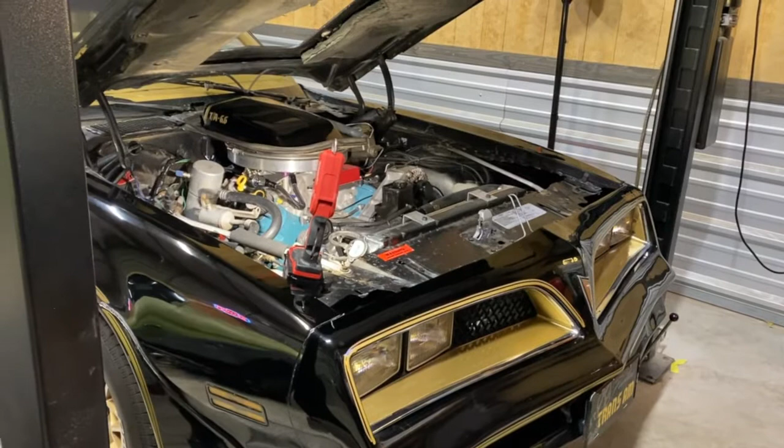Tonight's video, we want to cover some of the questions people have on the LS swap while keeping the 4-speed, factory 4-speed transmission. Before we did this swap, I looked on YouTube and online, and there were some answers, but everything was kind of like grab this bearing, grab this clutch, use this part from this other truck and put it all together and it may work. It was basically a mishmash of parts people were coming up with to make this work. There wasn't anything straightforward, any formula that says if you have a second gen F body with the old style Muncie or the Borg Warner Super T10, how do you connect the old style transmission to the new style engine and keep everything the same?

What I want to concentrate on tonight's video is going over that with you guys, giving you a little information on what we learned. It might not be the best way to do it, but this is the way we did it, and it happens that everything worked out for us.

In our situation, our car is carbureted. It's a 6.0 LQ9 engine, and we kept the carburetor. We went with the Edelbrock 7118 intake, and then the LS series tuning box, which is a 6014. This comes as a kit you can buy all together, so that's what we decided to do.

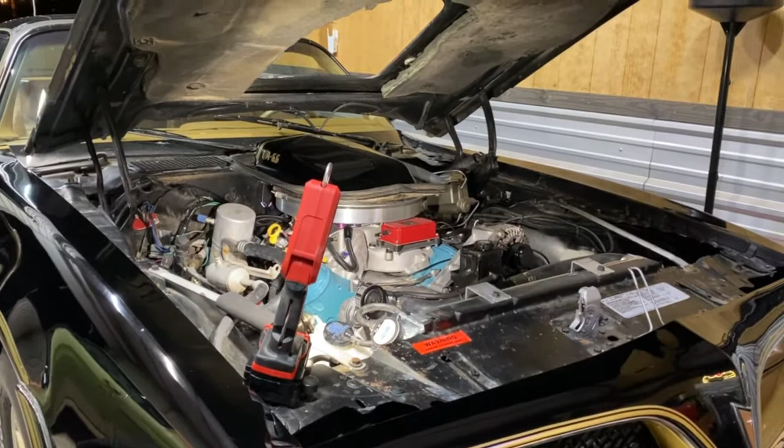But back to the transmission. The correct way to do it, and to get the best bang for the buck, is to order a transmission from a company called American Powertrain. They sell bolt-in kits with basically a 5-speed, or I believe you can order a 6-speed, a newer style transmission that will bolt up to your LS motor. It'll give you the new style transmission with 5th gear overdrive, since as you know these 4-speeds do not have an overdrive.

So that's the way to go if you want to do that. I tried to go that route, and I called American Powertrain - I'm sure they're worth every penny. I've seen plenty of coverage on the Optima Streetcar Challenge, different Pro Touring Camaros and Trans Ams, and some C10 channels using their transmissions. But man, it was $5,500, the quote I got to put one of those 5-speeds behind my 6.0. Don't get me wrong, I'd love to do it maybe down the road, maybe even later this year, but at the time we were doing the swap, I just couldn't swing it. It was a lot of money we didn't need to spend at the time.

So again, that is the easy way, if you want to just bolt something in - get an LS motor, whether it's a 5.3, 6.2, or 6.0, call American Powertrain and get one of their kits. It could be anywhere from $5,500 to $6,500, but they guarantee it's a bolt-in kit, you won't have any problems, and the performance advantage going that way is even better. But in our case, we stuck with the 4-speed. We went in not even knowing where to look. We did YouTube research, Google, all kinds of research trying to find ways we could do it. So let's start at the top real quick, and then we'll move to the bottom.

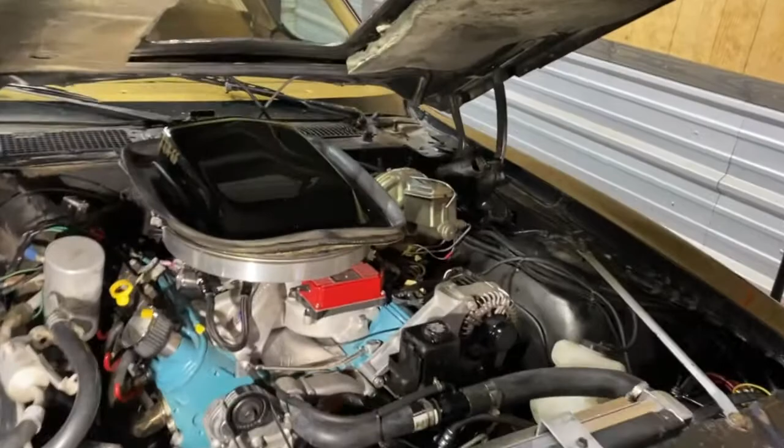We'll get the car up on the rack.

Starting at the top, the engine is a 6.0. I didn't mention this in the other video, but it is a fully rebuilt engine. It does have new pistons, rings, bearings, all the good stuff. The heads have been gone through. The cam is a Texas Speed and Performance, I believe it's a V2 or VR2, I think that's what they call it.

We went with that cam because we still wanted it to have a little bit of a cam sound, as you heard at the start of the video. So the car actually sounds really decent, about the same as it did when it had the stock 400 in it.

Bolting everything in was very straightforward. Everything went right in. We used BRP hot rod mounts that basically just replaced all the factory stuff, and then the engine sat right back in almost the stock factory location.

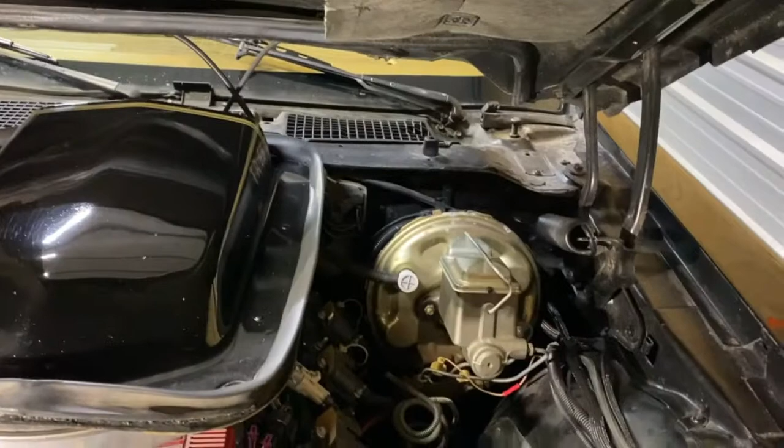Since the car is an AC car, we did keep the AC box. We kept the big power booster for the brakes and all that good stuff. The car already had some big electric fans on it when we got it, and a big aluminum radiator - I think it's a Griffin aluminum radiator - so we already had that. But again, that's basically what we did.

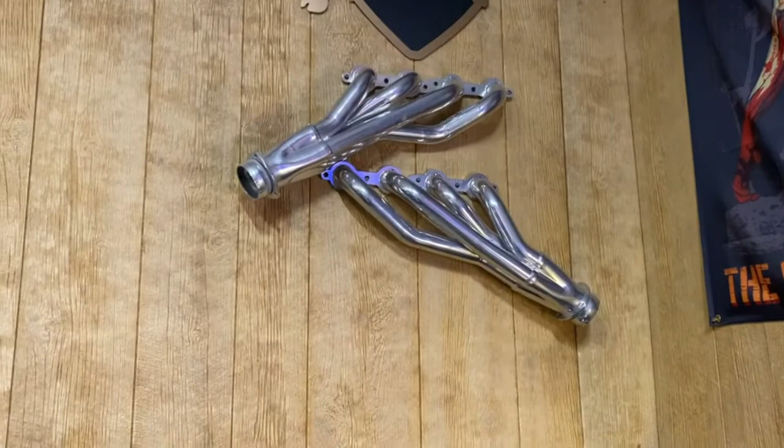The next thing that people had problems with is the headers, right? That's another big question that a lot of the F-body guys have: what headers do I use? Because what happens is when you have this setup with the 4-speed, especially keeping the mechanical linkage, there is a bar that runs across from the frame to the motor, called a Z-bar, and just about every header out there hits it. These headers we have up here on the wall, we actually got from BRP hot rods. They're super nice, they were like $600, right? They didn't work - there was just no way they were going to work with the Z-bar.

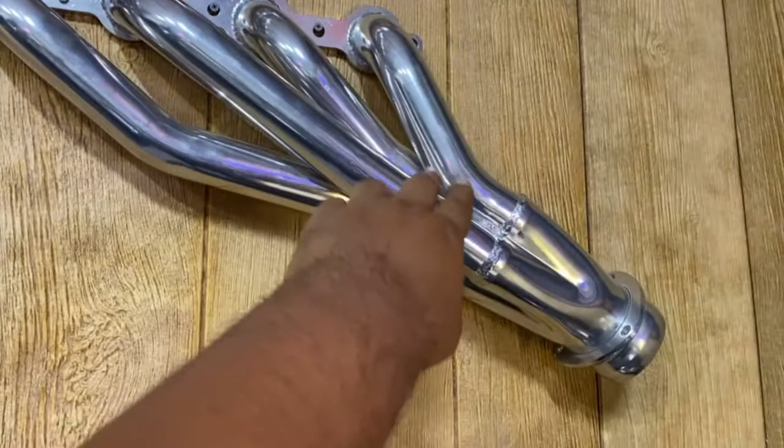Basically what was going to happen is this area here was going to make contact with the Z-bar, so there was just no way that was going to work. So let's get the car up on the lift, and we'll talk a little bit about what we did and what headers we used to get everything in there.

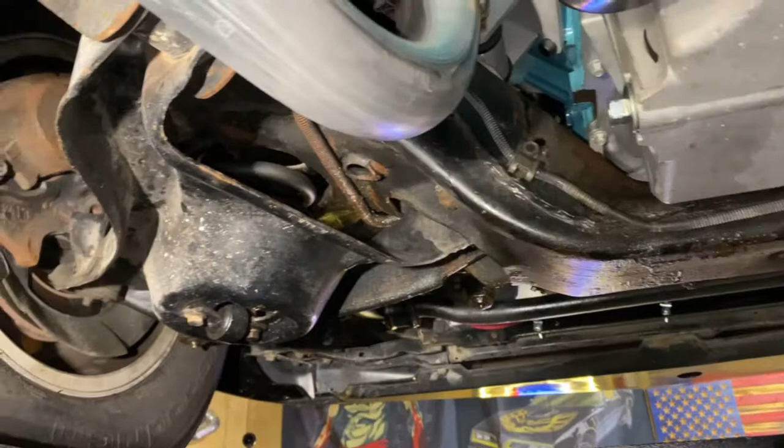All right, we're back. So looking at the exhaust system, looking at the headers - what some guys end up doing is they end up going with just manifolds, like off of a pickup truck. These headers are block huggers, I don't know if you can see them there. They're block huggers from Speed Engineering, and basically the way they sell them is to fit just about any GM vehicle, right? There's no guarantee that they're going to fit your application - they're kind of just universal.

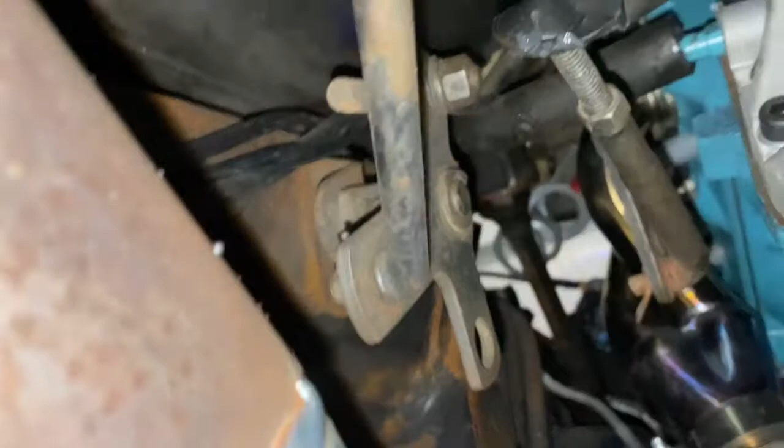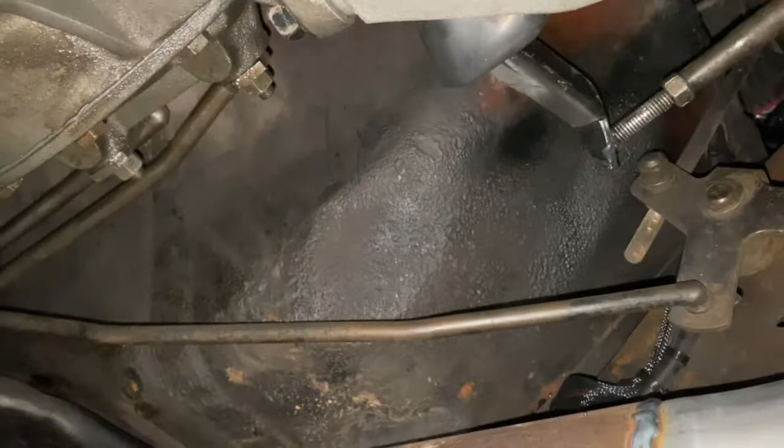But here I'll show you what I was talking about. You can see the Z-bar - I'll see if I can point my finger at it. The Z-bar is right there. It runs from the engine that way, runs to your linkage, to your rods. There's your clutch fork, and then there's all your shift assembly for the 4-speed.

So on the driver's side, it's wonderful. They fit, you've got all the room in the world. You go all around, they clear everything. They come with really cool V-bands, just like a turbo setup. So they work great, they go around everything.

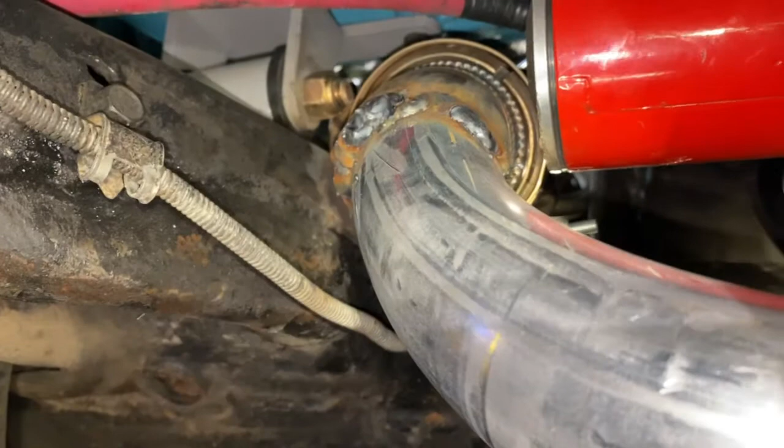But when you come to the passenger side, that's a whole other story. They come really, really tight to the frame - really tight, you can see right there. They come really tight to a mount, and really tight to the starter. Now we're using a bigger MSD starter. We did find that if we had used a stock GM starter, we would have had a lot more clearance, it would have been easier. But for right now, MSD is what we have, so that's what's going to stay in there for now.

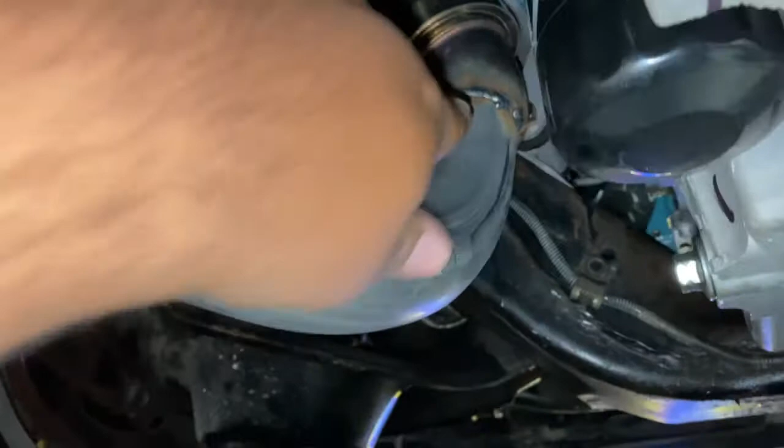So that was it, man. That's all we could find that would fit under here that we could use. Long tubes - a lot of guys said, what about long tubes? Well, as you can see, a long tube header would come through here, and the first thing it would hit would probably be that Z-bar.

If it didn't hit the Z-bar, the long tube would come down and probably make contact with this piece here, or they would have to come down really low, uncomfortably low. So we didn't want that. You know, the car is not a race car, it's just a cruiser street car. So that's why we kept it that way. It doesn't bother me none.

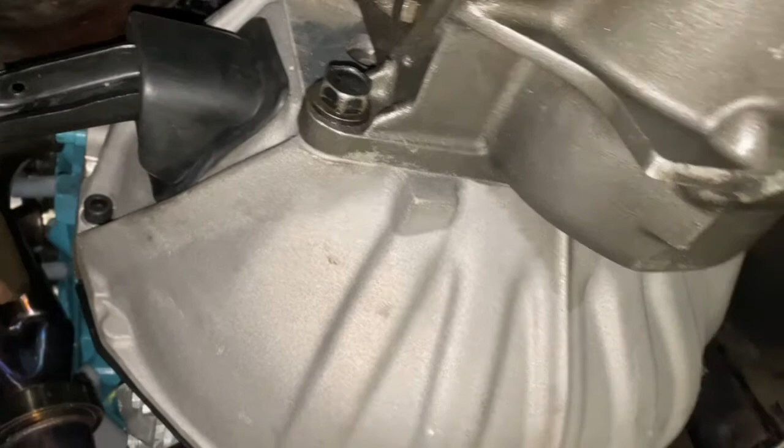It worked out perfect. Now, how to mate the 4-speed to the LS motor? Instead of ordering a bunch of mismatched parts, we went to Pace Performance, and they sold us an entire kit that was a bolt-in. It came with the new bell housing that bolts right up to the LS engine, designed for it. It came with a new clutch fork seal and new bolts to bolt everything up on the bell housing. I'll zoom in.

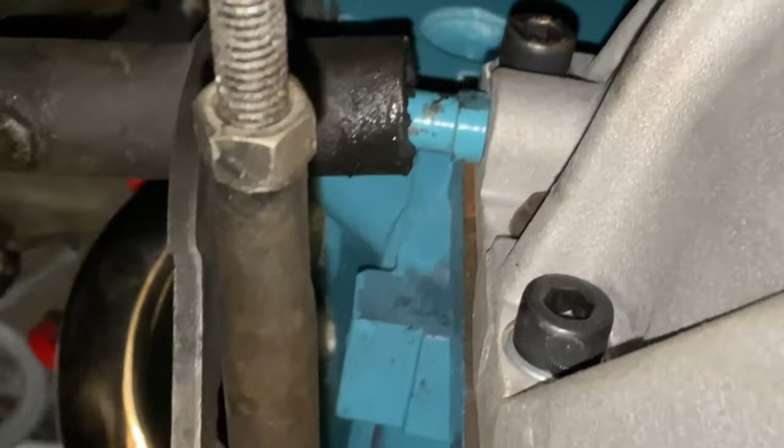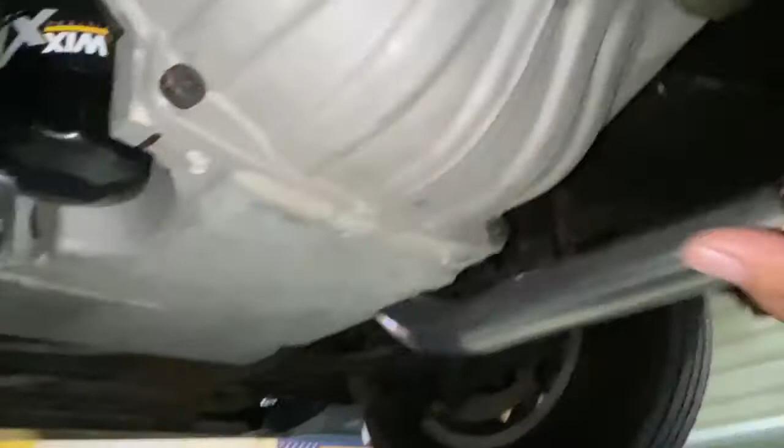You see that boss right there? You basically take your pivot ball off your factory engine and then screw it right into the bell housing. That allows you to run your Z-bar. The bell housing is spaced perfectly to allow you to bolt your 4-speed back on, and then everything stays back in the same spot. We used the stock cross member with the mount. It went right back to the factory mount.

So that was, honestly, for us, $1,000. Somebody asked, well, how much was that? It was $1,000. But you know what, it was worth it. It came with the bearing, came with a pilot bearing, came with a clutch fork, new clutch from Ram, clutch and pressure plate, new flywheel. It just came with everything we needed to get the job done. So it was well worth it.

Oil pan - some people have asked, what about the oil pan? Believe it or not, this is just an F-body oil pan off of like a 2002 Camaro or Trans Am. That's all it is, just a stock oil pan. Check it out, look how awesome it is. Look at that clearance.

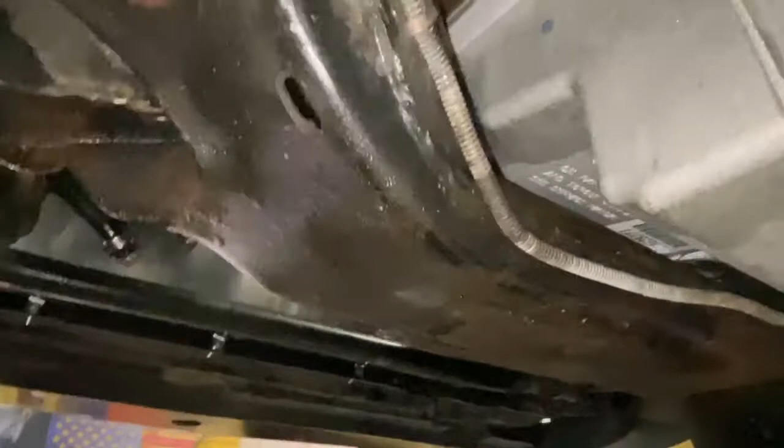And then here you can see the BRP mounts. No adjusting anything back and forth, they just go right in. So that's it, man. If you guys have any questions, please make a comment, post a comment, and I'll try to answer the questions as best as I can for you.

As far as tearing the car up to do this, we kind of did everything where it's removable. Everything can come right back out, and we can put the car right back to stock. We didn't cut any new holes, we didn't drill anything new. We left all the factory fuel lines in place, and all the factory return lines. Everything was retained, all the stock stuff was left.

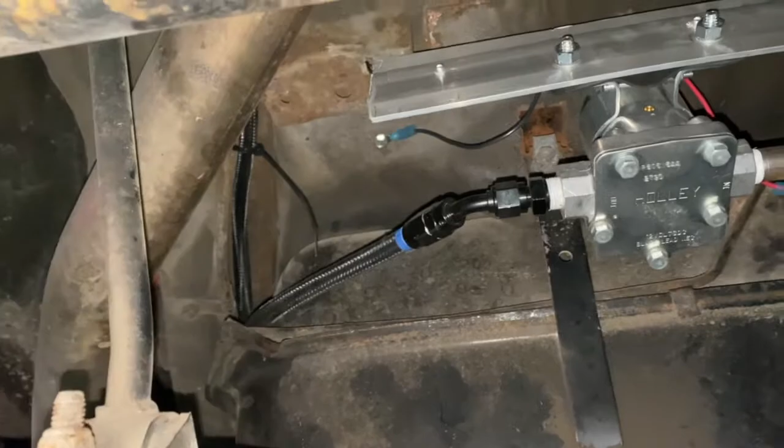For the fuel system, let's talk about the fuel system real quick. So what we did, again, it's just a Holley Blue, with some -6 line, with just a filter. And what we did is, we came with a little banjo fitting that went on to the factory feed line, the factory line coming out of the tank.

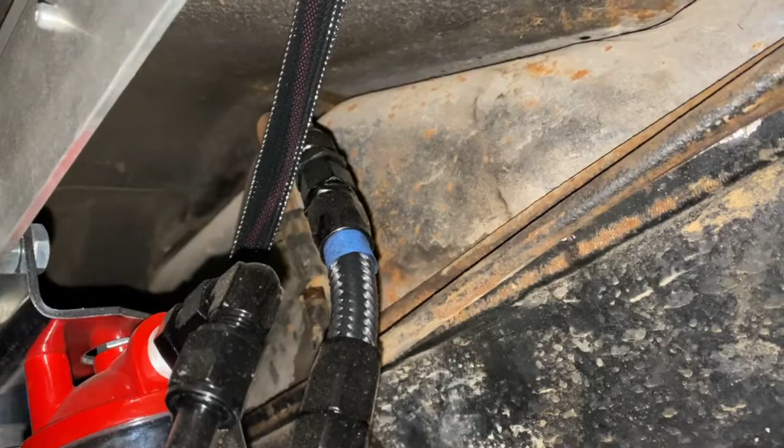I'll see if I can get the camera a little closer. Basically it's a banjo fitting that fits on there, it leaves us a -6 male, and then you basically just come in with your AN fittings. So we wouldn't cut up the car, we took advantage of anything that was a factory hole.

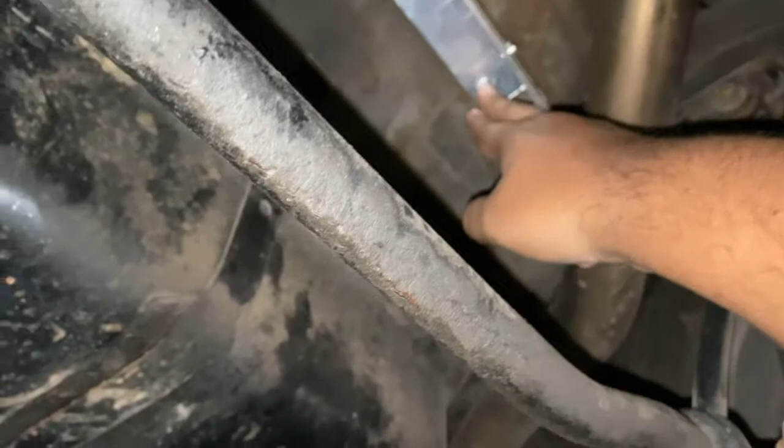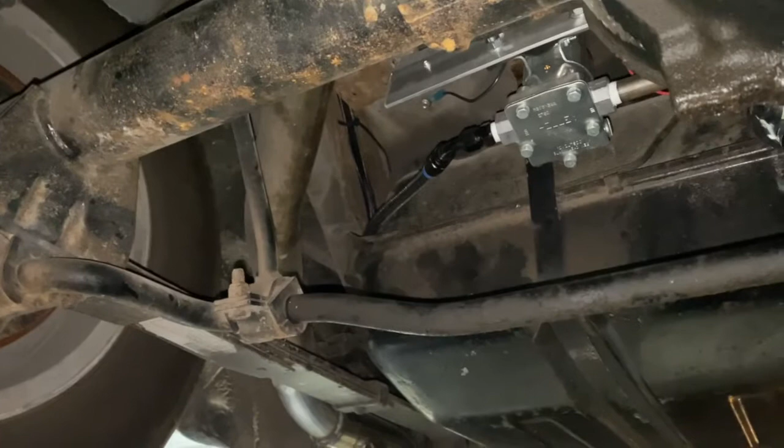Like here, the car had a factory exhaust hanger, so we just used that to mount this bar that we bought down at the Tractor Supply, and then we mounted everything to that. The Holley Blue, I'm not gonna lie, it is rowdy, it is loud, a little bit louder than I would like. So the plan is to order a new tank from Tanks Inc. with an internal fuel pump, because we do intend to go EFI down the road. So that's why we did that, and that's why we're gonna probably order a new tank.

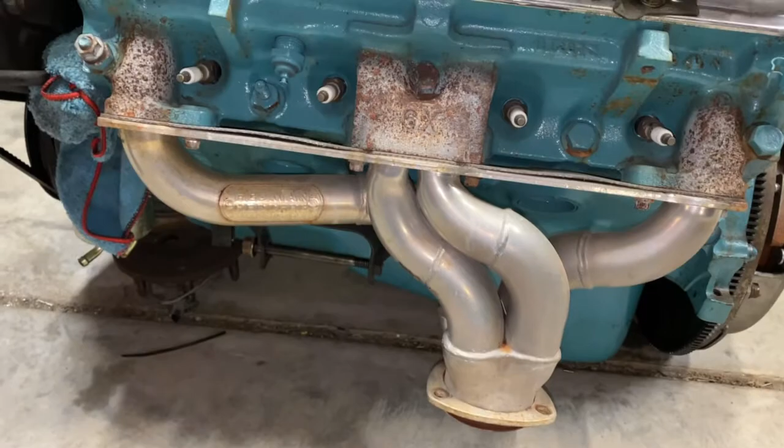See that? See, the car already had block huggers. So this is not an issue that is just on an LS swap. Obviously they had a problem with headers too, and that's why they had block huggers on there.

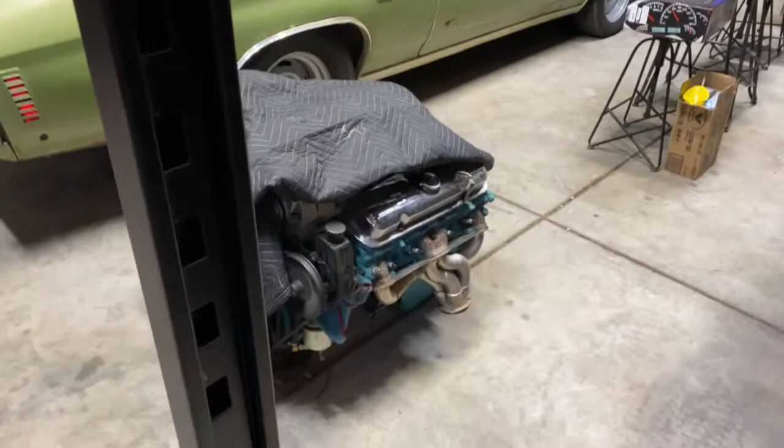All right, let's get the car back down and let's talk about getting the car running. Let's talk about getting it tuned up and getting it ready to go. Let's get the car down. Give me just a second. All right, we got the car back down. Let's talk about how to get the car started with the carburetor setup and the MSD setup.

It's actually pretty straightforward. The only difference here is that you still use the carburetor, so you're still going to have to adjust your carburetor how you normally would. The best way to adjust a carburetor, as you guys know, is connect a vacuum gauge to one of the ports, preferably one of the direct ports for full vacuum, and then basically just adjust your carburetor accordingly. Your air and fuel mixture, what you're looking for is the highest vacuum reading that you can get at idle, right?

And then the other setting, for our fuel pump, we used a Holley Blue. We just adjusted our regulator to about 7 psi of fuel, and then we adjusted the float bowls on the carburetor basically about halfway up, midway up on the sight screws to get that done.

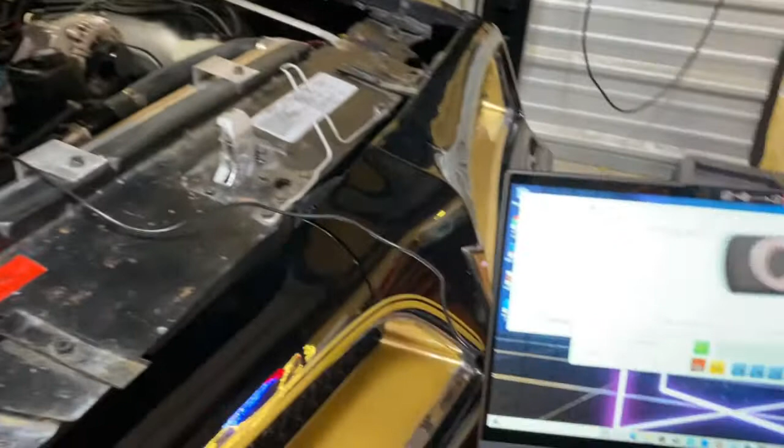And then from that point forward, since you don't have a distributor anymore to set your timing, what they give you is this little USB. You plug it into your computer, your laptop, whatever. You download the program to it. It comes with 2 programs, and that's what you're going to use to start the car up.

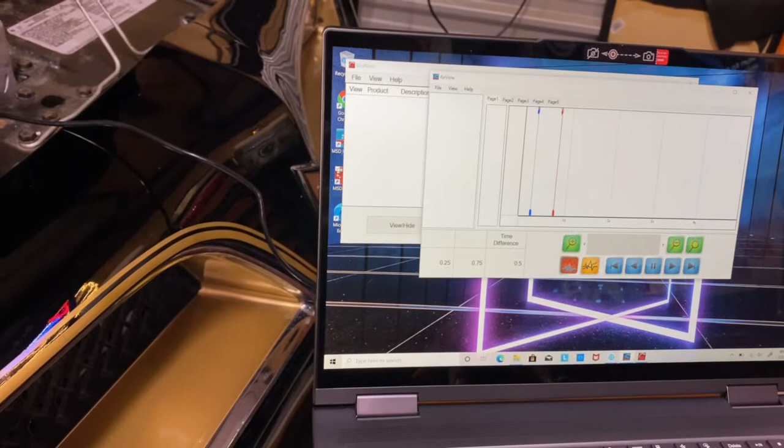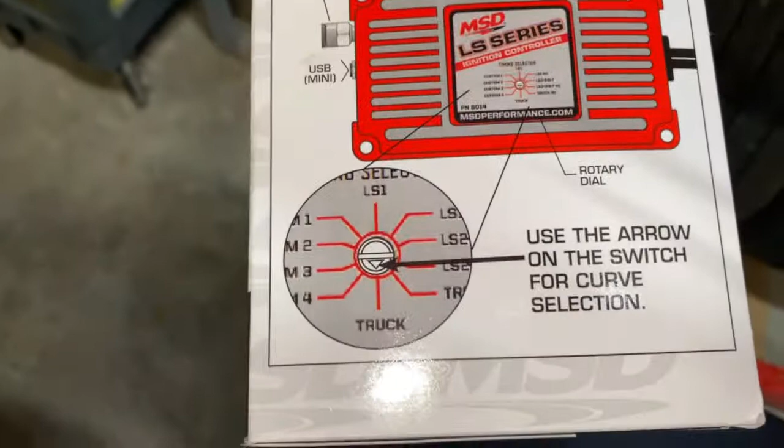Now, what we did is we did a little bit of research, checked with a few guys, we even checked with a friend of ours that's actually a tuner, and we asked him about how to go about this. So the box itself has a little dial, and I'll show you on the box over here, on the MSD box. The box has a dial that you can set up, and I call it a tune, but it's not really a tune, it's just a timing curve, right?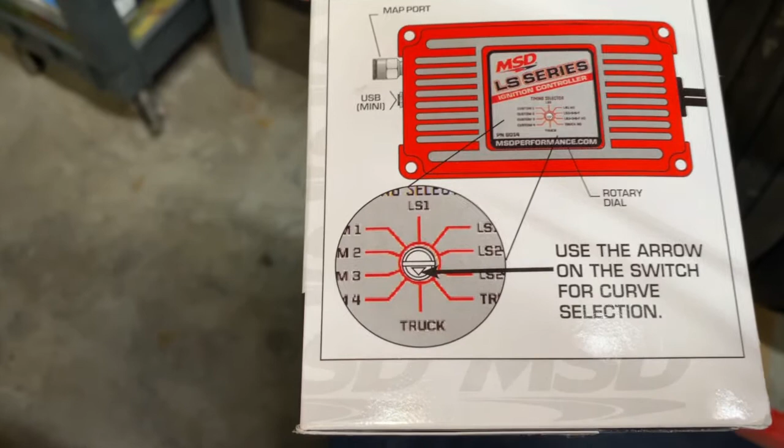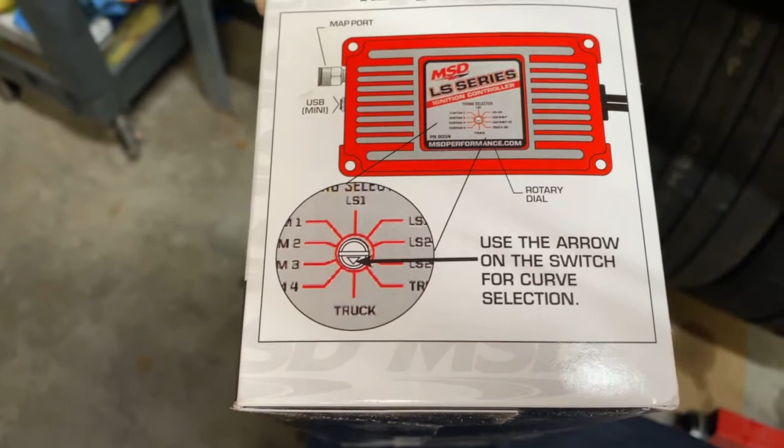It's from idle to whatever you decide that you're going to max out to. In this case, we set the limiter at 6,500 RPM. It is pretty cool, the box does come with, it even comes with, if you want to do a line lock, if you want to do a stutter box or anything like that, you can set that up with this, and you'll be carbureted, and you can still do this, right?

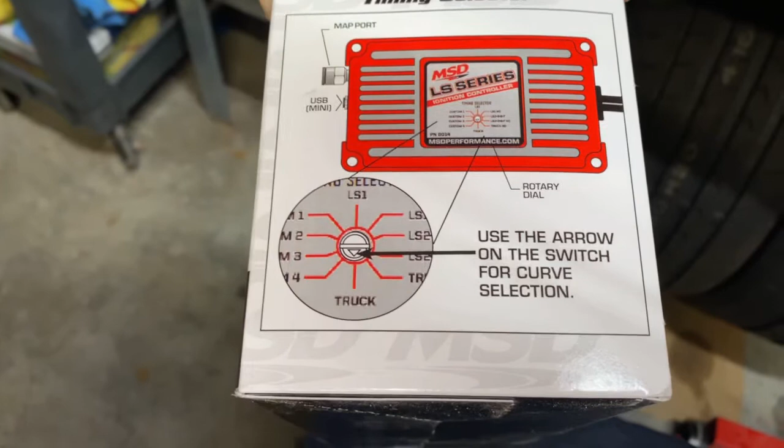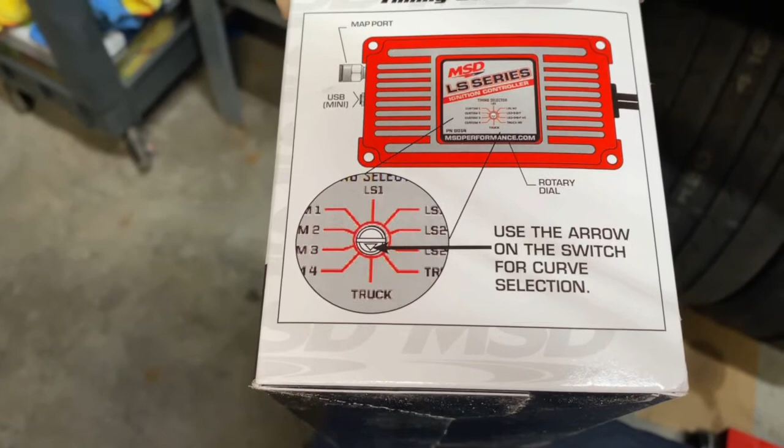So they're going to give you 4 different curves: Custom 1, Custom 2, Custom 3, and Custom 4. And then they give you some preloaded tunes. The preloaded tunes are a little aggressive, a lot of timing. Doing some research on a 6.0, they don't like a lot of timing, especially with a lot of compression. This motor we kind of estimate to be almost at 11-to-1 compression, so you don't want to give it too much timing.

Basically, what you can do is, it's really neat because you can load 4 different curves into the box, and then you can go straight to the box. It's going to have a little rotary dial on it, you can see it right there. And then basically what you do is you use a little screwdriver, you go in there and select Custom 1, Custom 2, Custom 3, Custom 4, and you can change your curve according to your needs, right?

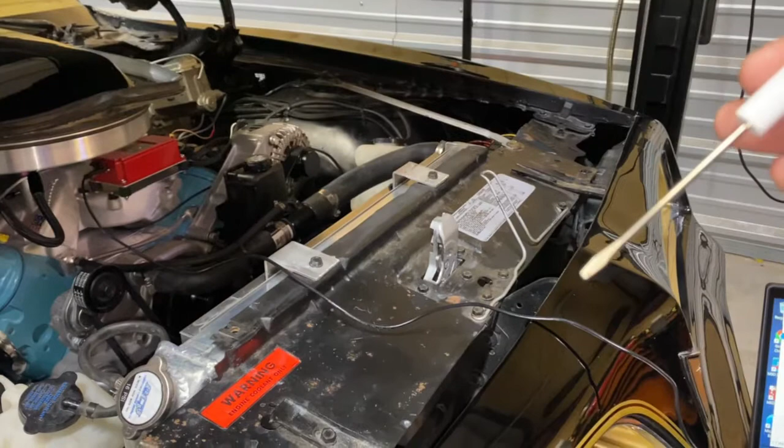If you're running super unleaded or regular unleaded, you can change that around. It's the same thing as a distributor. On a distributor, you just back out the timing or bump up the timing. It's the same thing, the only difference is you're doing it with a laptop, or in this case with a little screwdriver, instead of using a wrench.

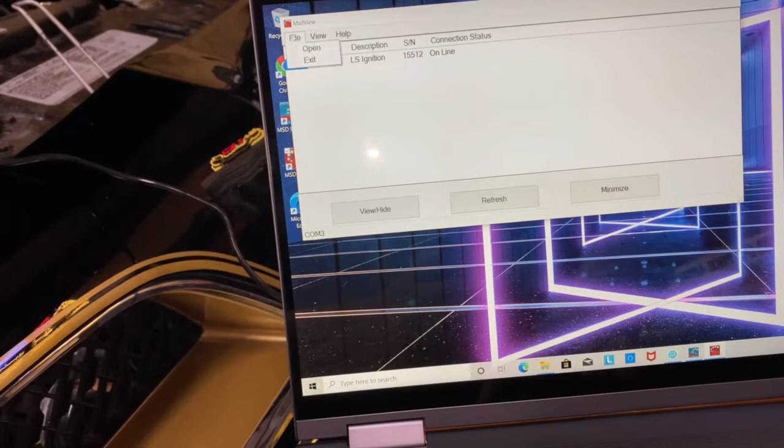So in this case, let's open up the program. This is a 6014 box.

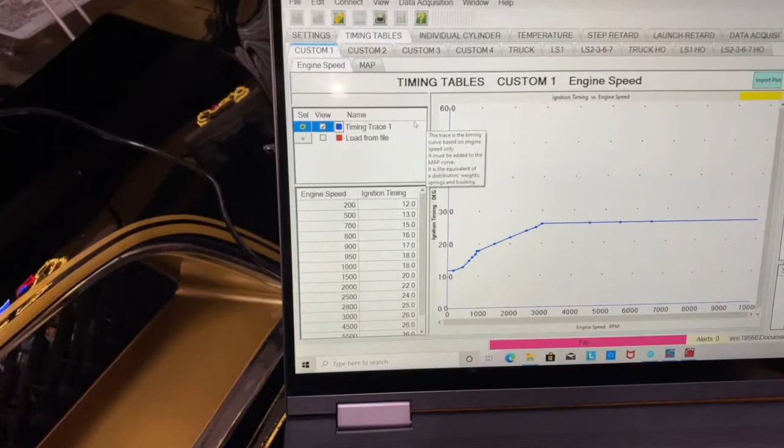We'll go to the tune that we have in the car right now. And again, I keep calling it a tune, but it's not a tune, it's just a curve, right? So we have it set at Custom 1. And then this is the curve that we started, right?

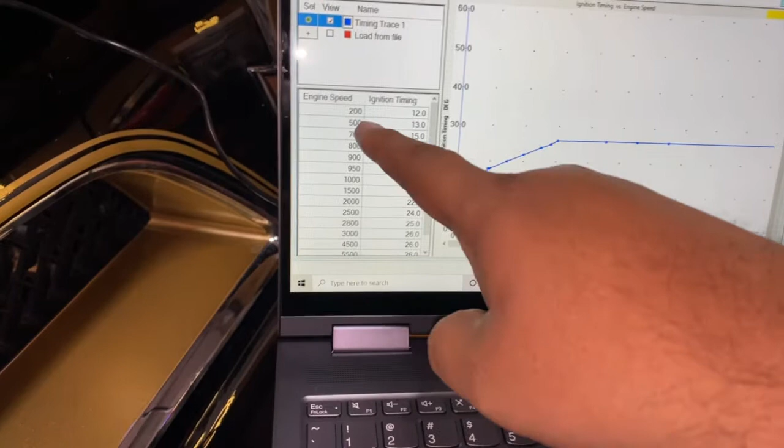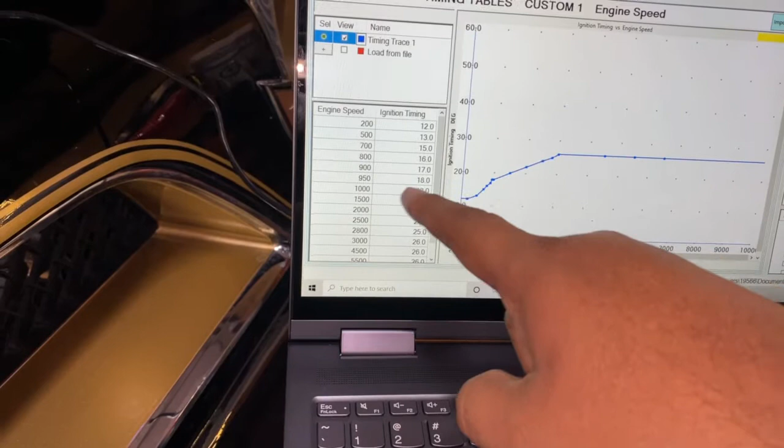We started at 200 RPM, we gave it 12 degrees. At 500 RPM, we gave it 13 degrees. 700 we gave it 15, 800 we gave it 16, 900 we gave it 17. So at idle, the car idles between 900 to 950.

It's at about 18 degrees of timing. According to the tuner we spoke to, that's what he likes. It seems a little aggressive to me, but he said that's where it works best.

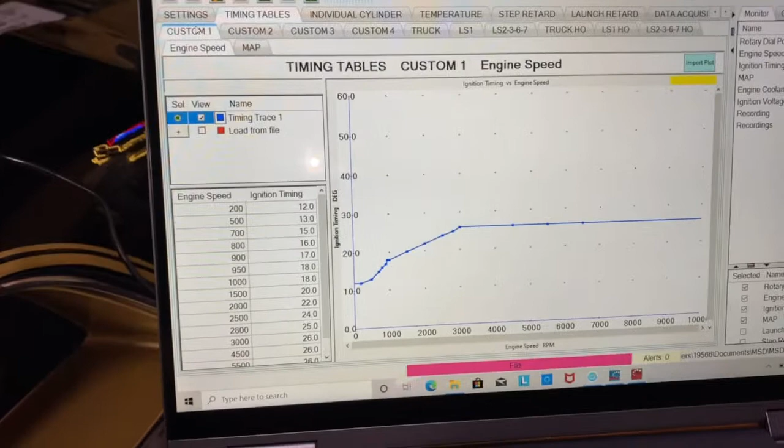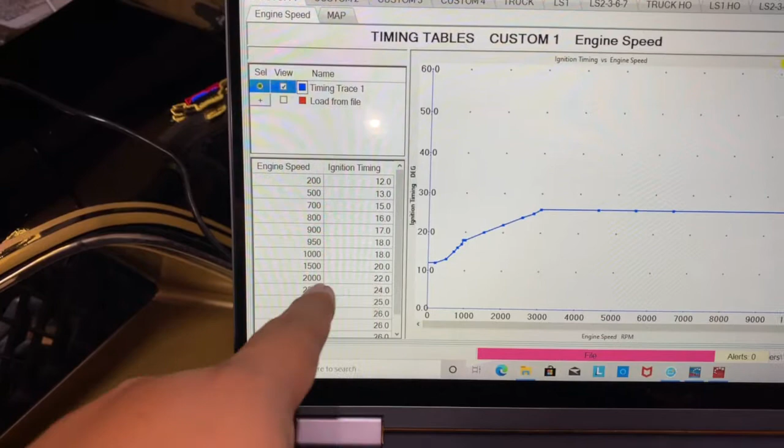From that point forward, we went to 1,000 RPM and kept it at 18, then 1,500 RPM we went to 20, and so on, until you get to 4,500 RPM, it's still at 26 degrees of timing.

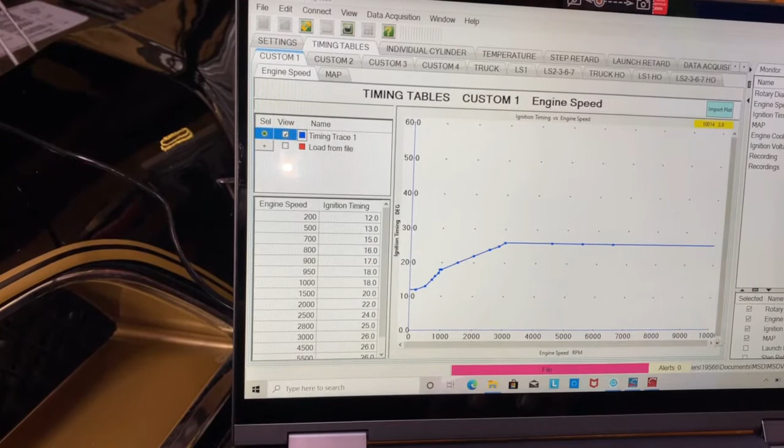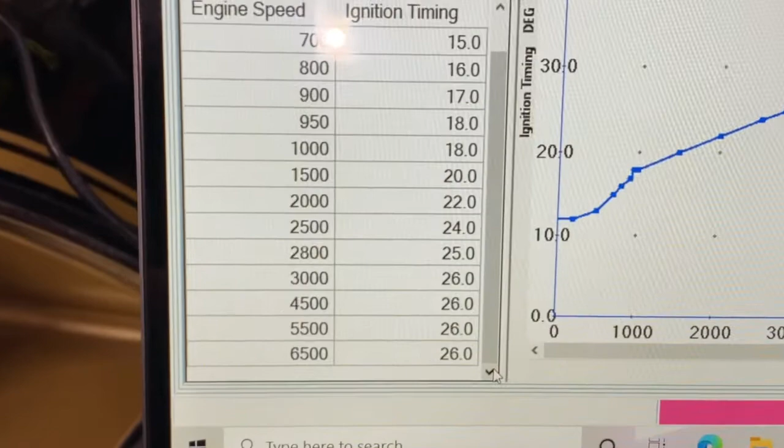So basically, if you've ever messed around with a carburetor, it's the same thing, except here you can actually see, or actually set, your timing like that. Let me zoom in a little bit so you guys can see it. Here you've got your 20, you got 3,000 RPM, we're at 26 degrees, look over here.

It tells you that right now we're in rotary position number 1, Custom 1. This is a live system. You can turn the car on and change your curve on the fly, and you'll actually see a difference in the car.

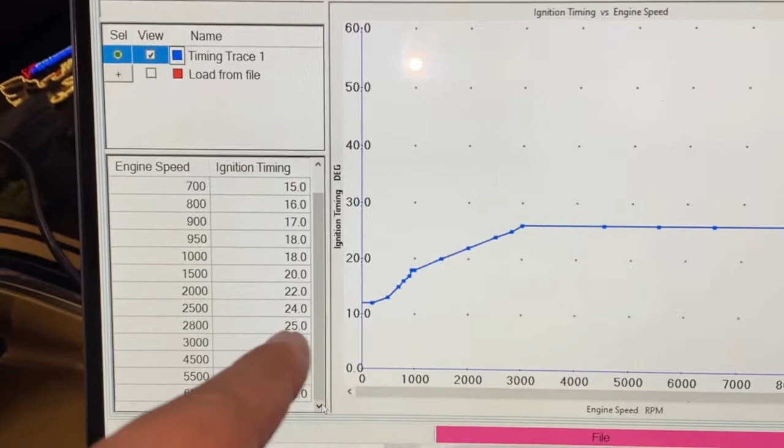We did it when we changed the idle. We changed the idle a little bit, the timing around 950. We pulled timing out and you could actually hear it in the engine.

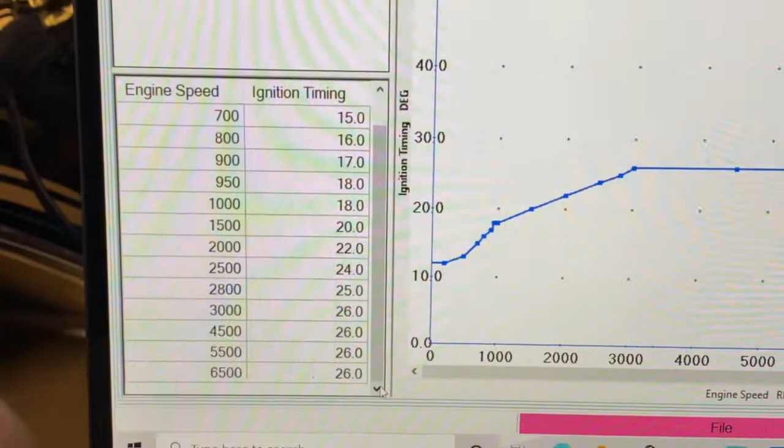And then over here, it gives you the readings: your engine speed, your ignition timing, your MAP setting, your coolant temperature, and all that stuff. Right now we are connected, we've got the wire here connected to it.

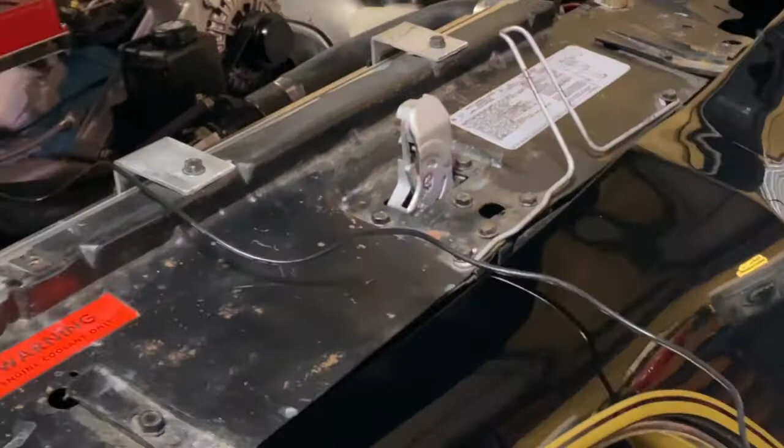I'm not going to turn it on because the fans are so super loud, you guys won't be able to hear me, right? Let's go to Custom 2.

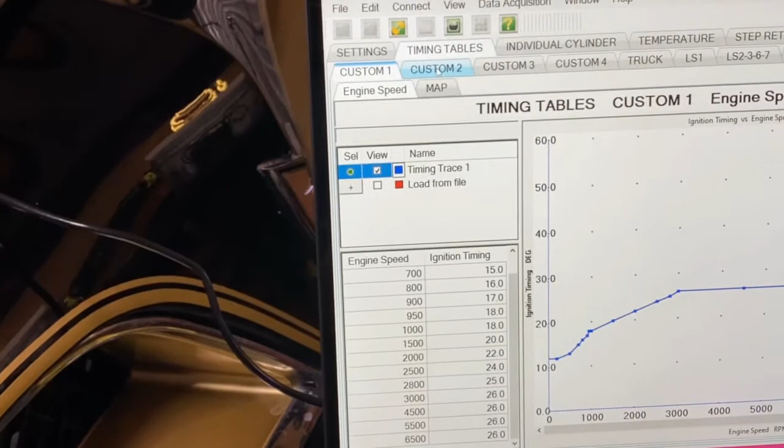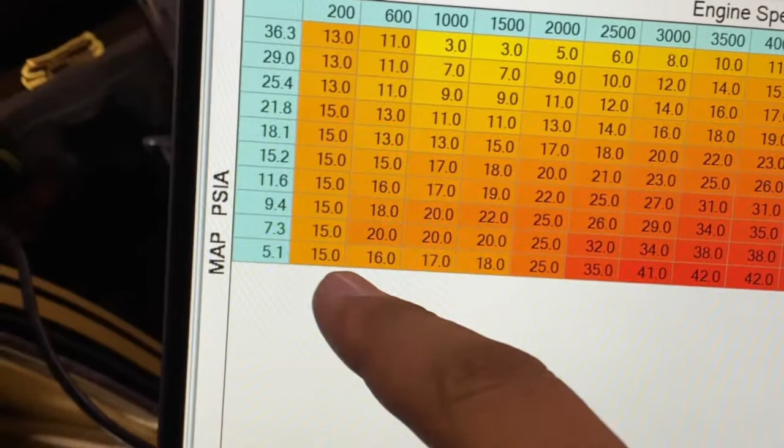So this is Custom 2, another one. Again, you can choose this with the rotary dial. Now, since we're not using the MAP at all, we're going to be using this lower table down here. So here it tells us at 200 RPM we're at 15, 600 RPM we're at 16, 1,000 RPM we're at 17, and it just keeps going on and on.

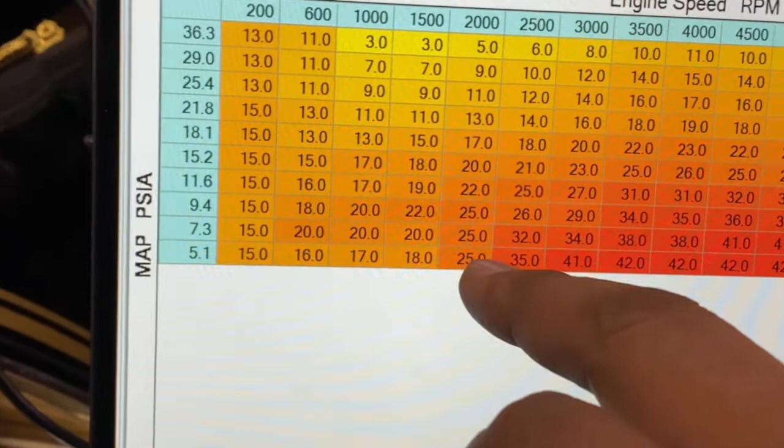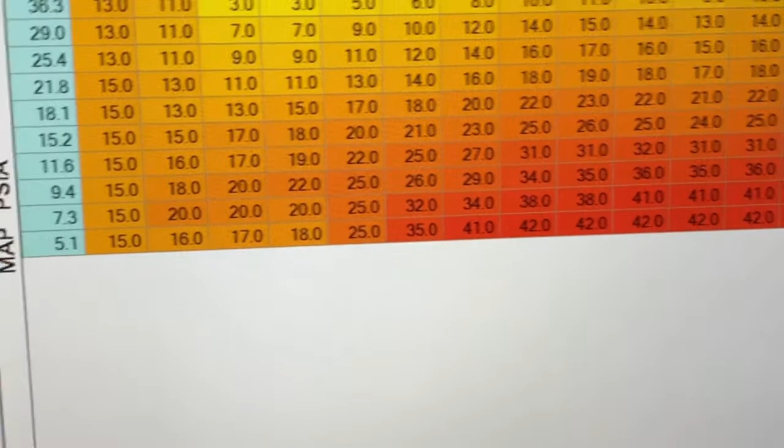And then at 2,500 they jump to 35. At 3,000 they jump to 41, 42, 42, 42, 42, all the way across. That's kind of aggressive from what I understand on this type of setup, right?

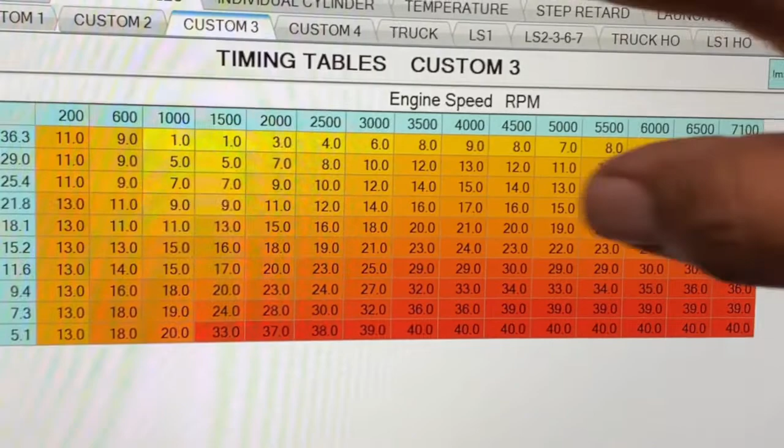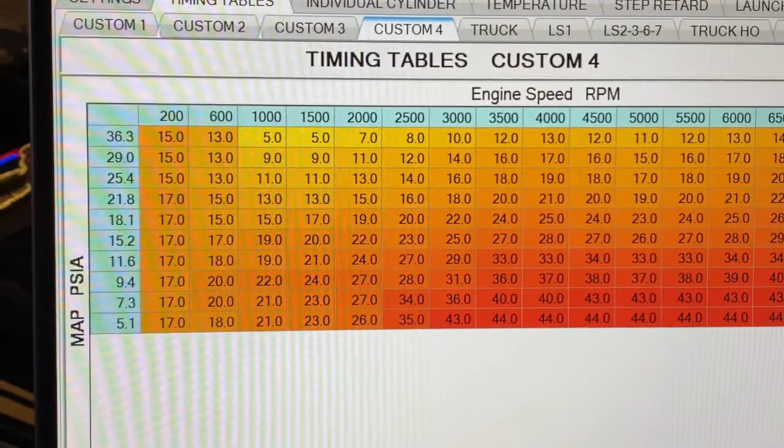I forgot this thing is a touchscreen. I do intend to set the 4 different tables, right? That's another table, that's Custom 4, right? I do intend to set up all the tables, and once I'm satisfied with them, I'll be able to just use my little screwdriver and my rotary dial to switch them around.

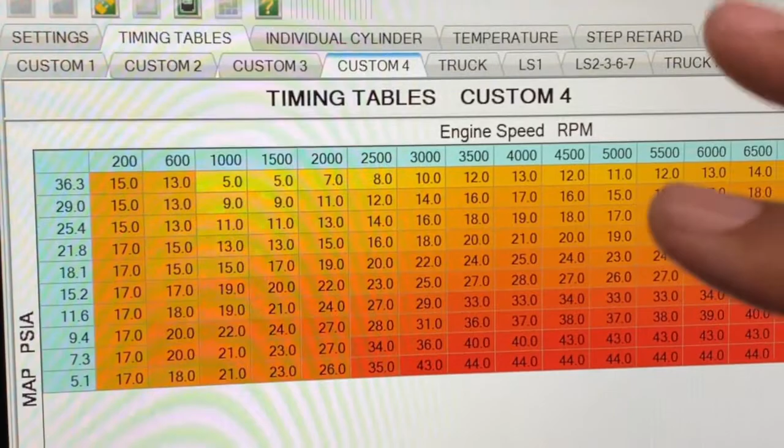It does come with preset tunes, like set tunes. For example, you can choose an LS1 engine, that would be like a 5.7. And again, since we're not using the map, you would use that in a boosted application like a turbo or supercharger.

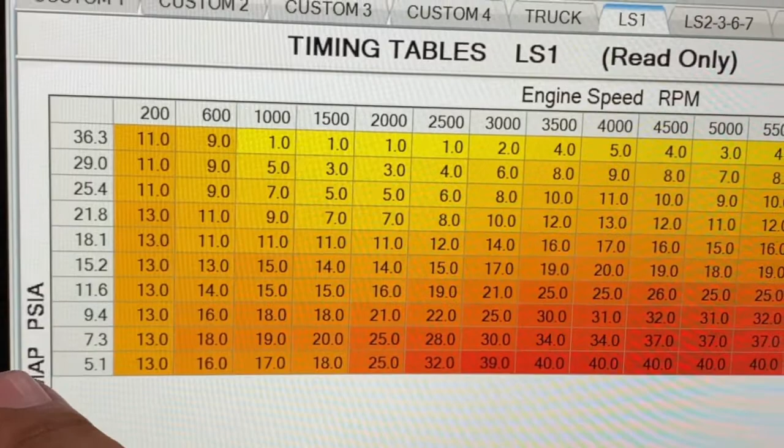And then you would connect a vacuum hose and you would get your map reading. Since we're not doing that, we're only going to use the bottom line here, right? So again, here you can see for an LS engine, you notice here it says read only, you can't make changes here.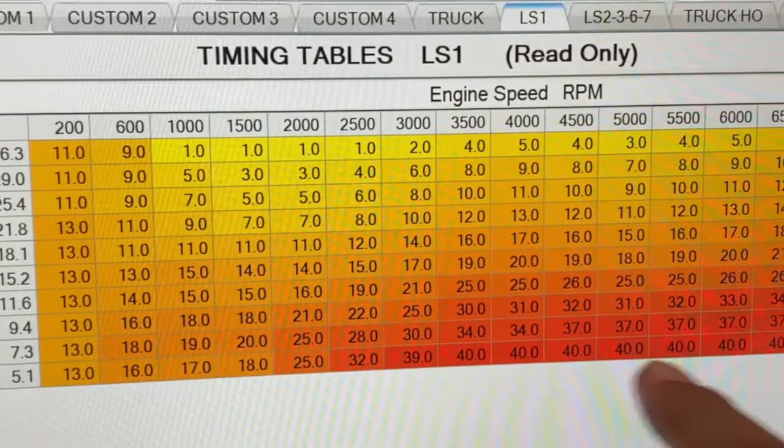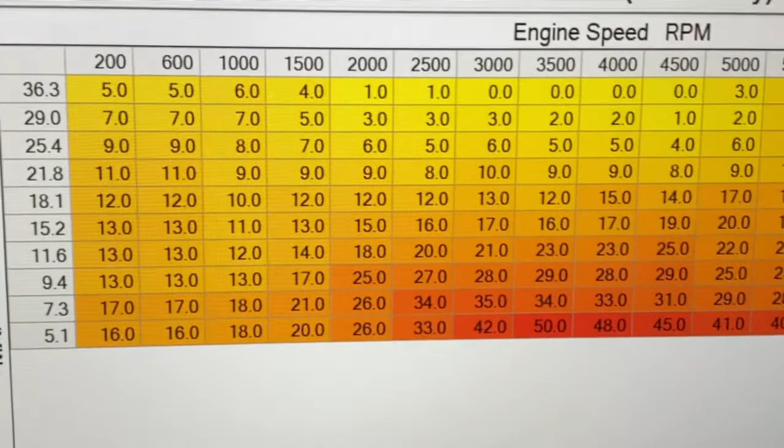There you've got your different timing curve, and then you've got the truck setting, right? Where you could use that, that's like for a pickup. Well, look at that, 48 degrees at 4,000 RPM. Whew, better be running some race fuel there, buddy. And then of course it's got the truck HO.

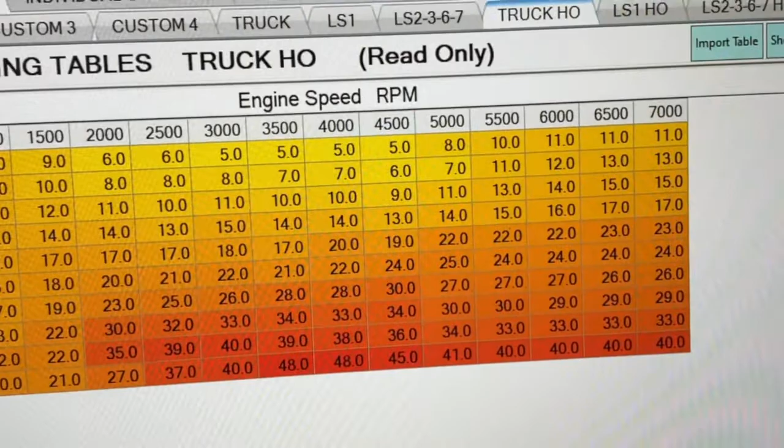Truck HO is if you're running super unleaded, from what I understand. You can tune by cylinder if you want. You can actually change the timing if you've got a cylinder that's running too hot. Again, this is for the turbo guys, this is for the boosted guys. I'm NA, this doesn't pertain to me.

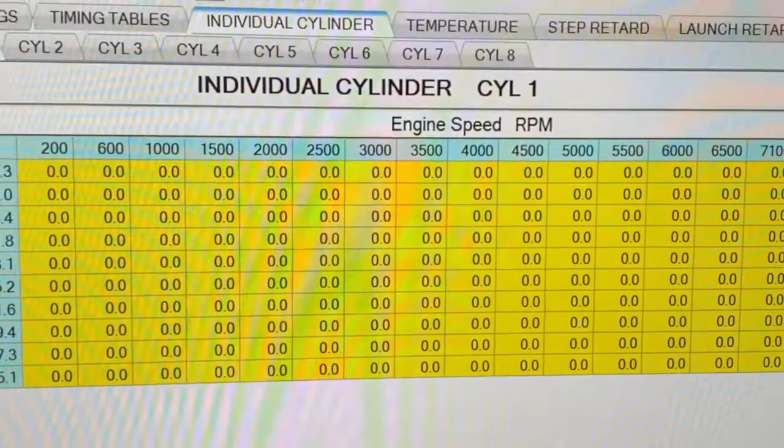You can tune by temperature, right? You can actually set it up to where you can pull timing depending on how hot the car gets, or where the temperature is, or how cold it is.

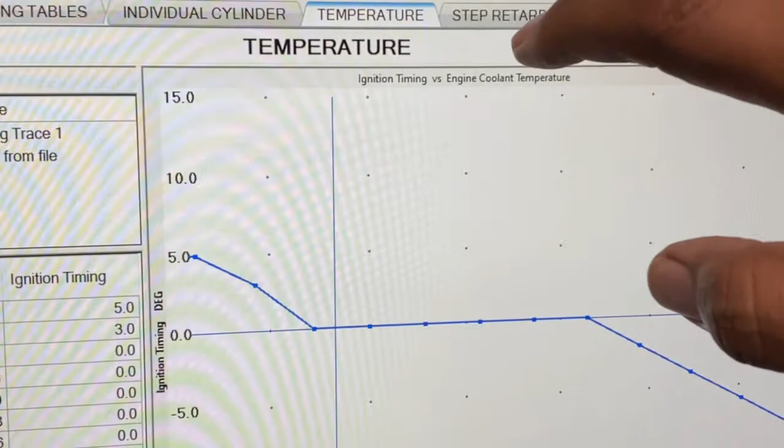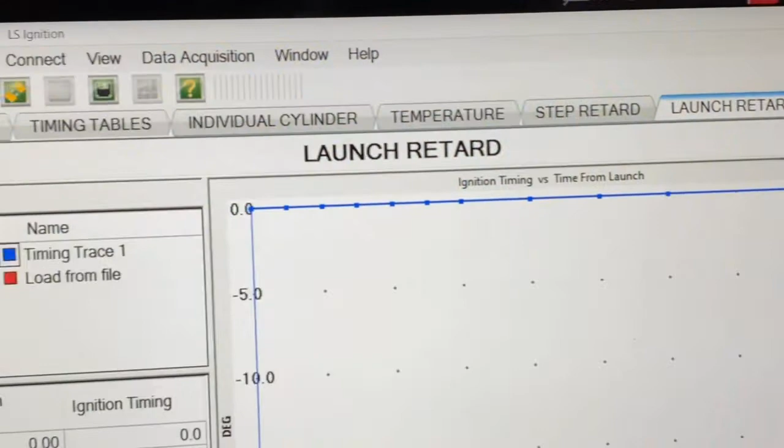You've got a step retard box. This is for nitrous. You can actually hook it up to your nitrous box, your nitrous system, and engage it with a button. You connect it basically to your solenoids, so when your solenoids engage, you'll be able to pull timing out of the car. How cool is that? And then of course you've got your launch retard, right, which is the step, and then you've got your data acquisition, right?

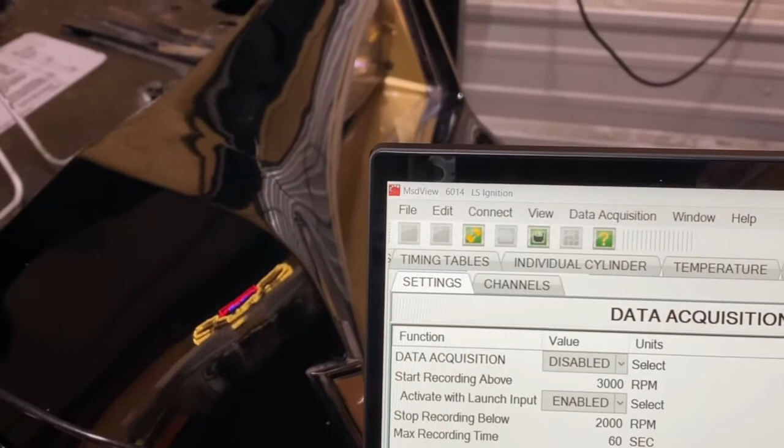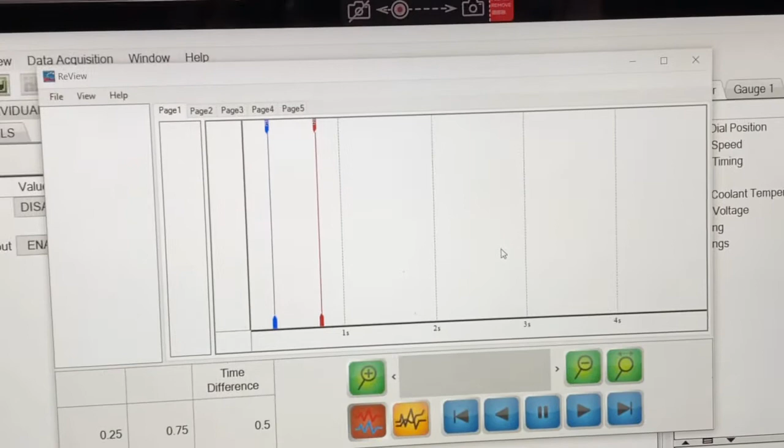Now, if you want to go live and drive the car around, you can open up this screen here, and with this screen you can actually put the laptop in the car. The cable is long enough to reach in the car. Put the cable in the car, the laptop in the car with you, turn the car on, go for a drive. In here you can record, and it'll give you a reading of what's going on, and then you can come back and play it back so you can see.

That's actually something we're going to try probably over the next couple of days. We're going to try hooking it up inside the car and take the car for a drive and see what it does. This would obviously work really well if you're at the racetrack, and you want to run the car, make a pass, and then come back and make some changes.

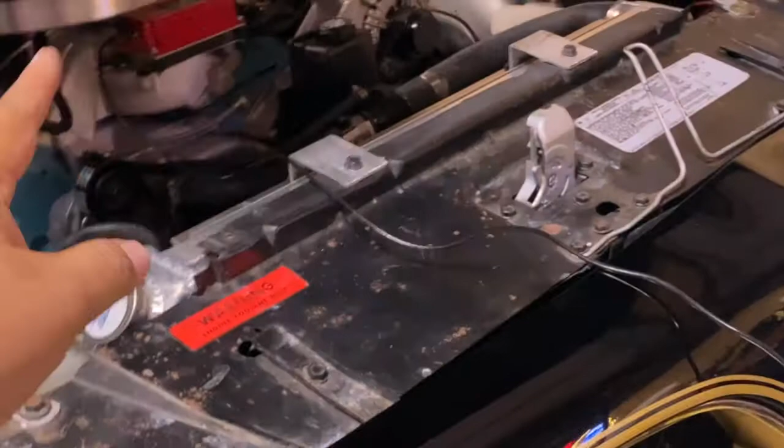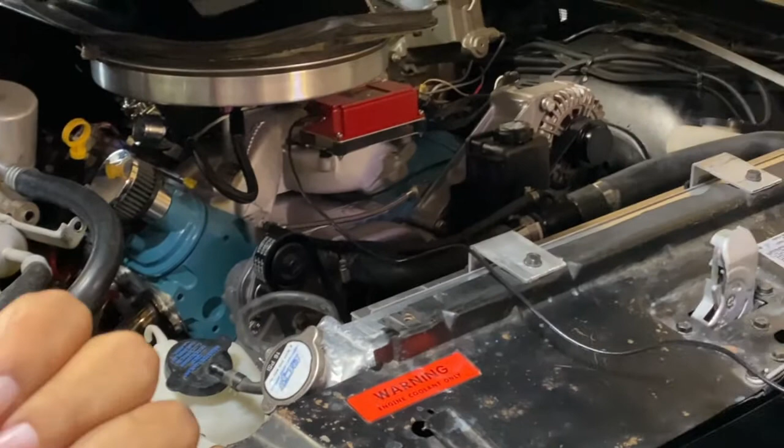Now, keeping it very simple, guys, this is just timing. You're not changing your fuel curve, you're not changing any of that stuff. This is just timing. This is no different than old school guys like myself going to the track, running the big block Chevelle at 32 degrees of timing and saying, man, I wonder if it'll run better at 34.

You get your 9/16, you move your distributor a little bit to 34 with the timing light, and then you go make a pass, and it went a couple of tenths faster. You come back and bump up the timing a little bit more to 36, and you go make another hit, same thing. The only difference is here you're doing it with a laptop, right?

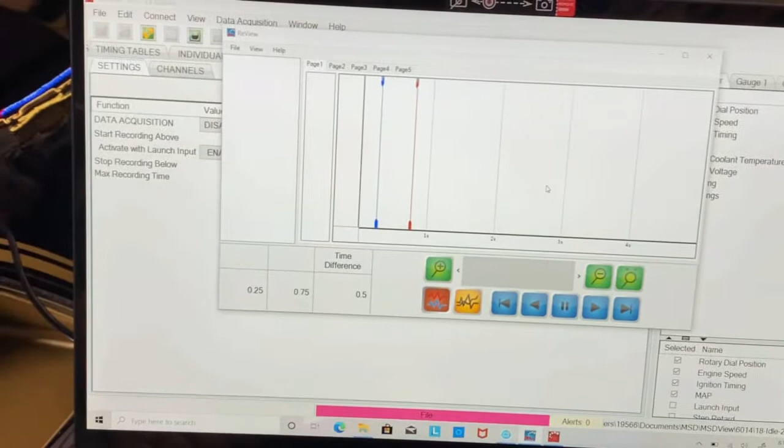So I know some of the old school guys fight this. Trust me, I've fought this forever, but eventually we just got to give in. As you guys saw, they're announcing that they're going to do away with gasoline cars by 2035. That, to me personally, that's nuts, but whatever.